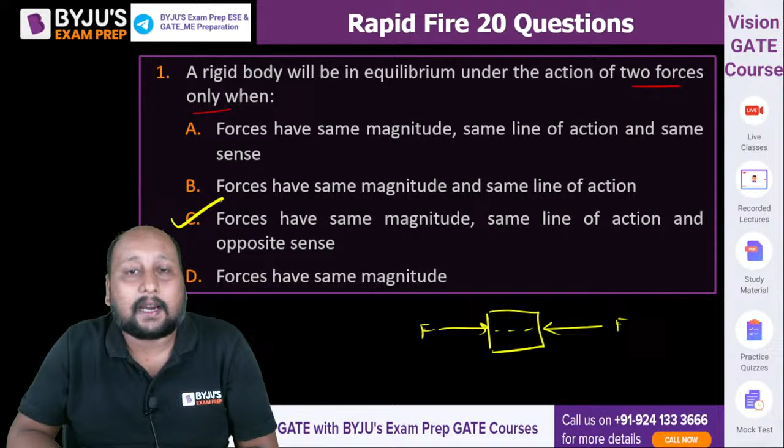Very good, Shreyas. Next, question number 2 on the screen. All clear? Anyone having doubt? Because if you have two forces, for the body to be in equilibrium both forces should have the same line of action, and also be at the opposite sense. F right side, F left side, they should act in opposite sense but same magnitude, then only the body will be in equilibrium. Because what is the equilibrium condition? The total force equal to 0 and the total moment equal to 0.

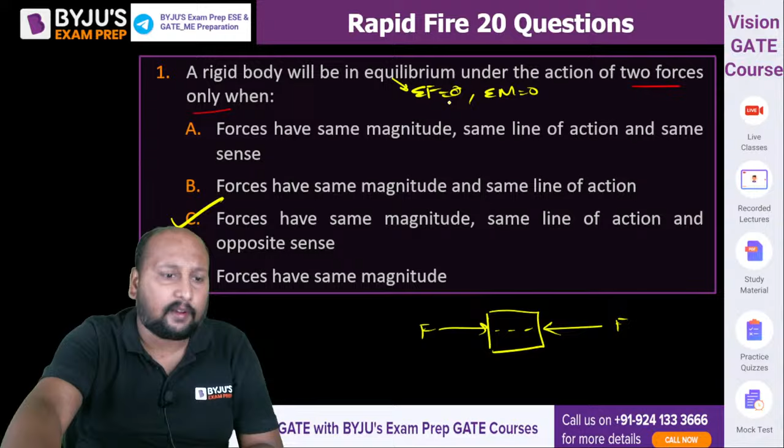Next question. Concurrent forces 2, root 3, 5, root 3 and 2 kilonewton act on one of the angular points of a regular hexagon towards the remaining 5 angular points. Determine the magnitude and direction of the resultant force. These are the angular points of a regular hexagon. What will be the magnitude and direction of the resultant force? Option A, B, C, or D? Simple question. Quickly, these are concurrent forces. So basically hexagon means we have 1, 2, 3, 4, 5 forces acting.

Quickly, A, B, C or D? Is it 10? Is it 1? Is it 10, 20? Your direction is 0, 180, 60 or 0 degree.

Draw the diagram. They're basically talking about a regular hexagon. So basically you know what's the angle between a hexagon's points. Okay, if I say this is a hexagon, right? So I can simply say this is your 2 kilonewton, this will be your root 3, right? This will be your root 5 or 5, this is your root 3, and this is your 2.

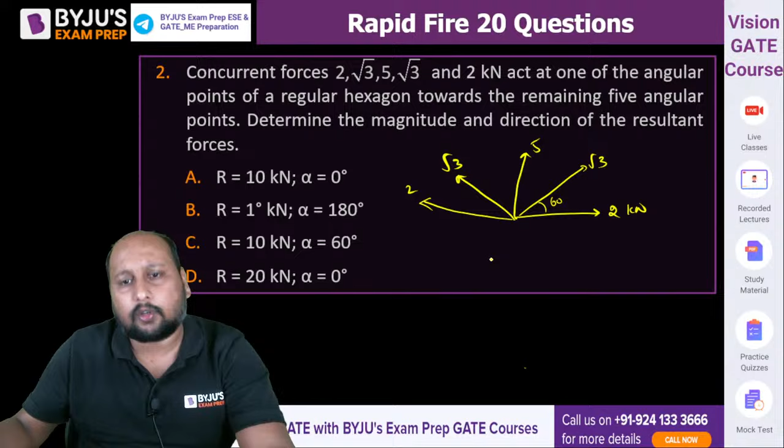Quickly, tell me the final answer. You have to calculate only 2 things, the total horizontal force and total vertical force. You calculate total horizontal force, total vertical force, you resolve the component, and then you can take tan theta is equal to, or tan alpha is equal to total vertical by total horizontal.

Option C, Sandeep is getting option C. What's the total horizontal force you are getting? Anyone who has calculated, use without any calculators, try to calculate total horizontal force, total vertical force, and tell me the result of that. Yes, Tarun, Shrey, Sandeep, you are getting option C. Might be you have solved this. Shreyash, Ashish, yes, quickly.

Done. Done. You have to take 60 degree each, right? So take the cos of this. We can say 2 plus root 3 cos 60 plus 5 cos 120, plus root 3 cos 180 plus 2 cos 240, like this. Similarly, we'll be having the sine component. You'll be getting total horizontal force will be equal to 5. Total vertical force I am getting like somewhere around 8, right?

8.6. So you take the resultant is equal to under root of total horizontal square plus total vertical square. So this is 5 square plus 8.6 whole square under root of this. So this is 25 plus 64, near about we'll be getting under root of 25 plus 66. So near about 200, near about 100 we'll be getting. Okay, so that is 10 kilonewton.

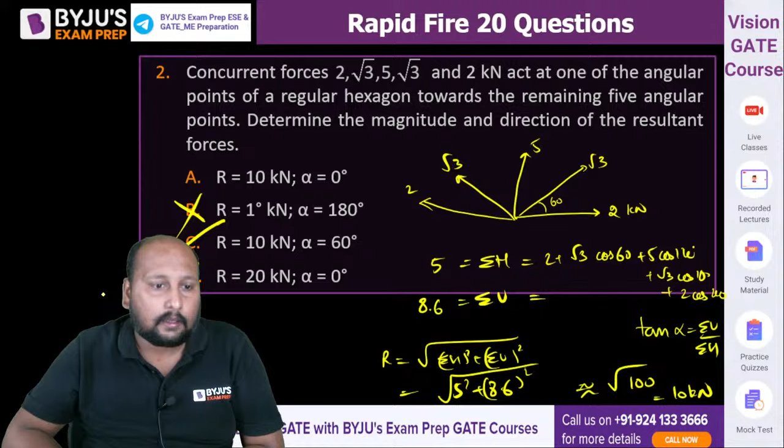10 kilonewton means you can eliminate option B and D, and definitely you cannot have an angle of 0 degree. We can only be left off with 60. You cannot have a 0 degree angle as a resultant force. So definitely you are only left off with option C as the correct answer. Okay, clear? Right? Next question on the screen.

A simple problem. 2 identical trusses support a load of 100 Newton as shown in the figure. The length of each truss is 0.1, cross section 9.94, we can round off to 10. That's why we're getting under root of 100, near about that, because we are not using a calculator now, so we have to approximate the value.

Okay, we are having the cross section area, we are having the Young's modulus. What is the net force in the truss AC? This is point C. Can we take the simple concept of Lami's theorem and get the answer? Or you can resolve the force and you can get the answer. Because both the members are inclined at the same angle, so equally the force will be distributed.

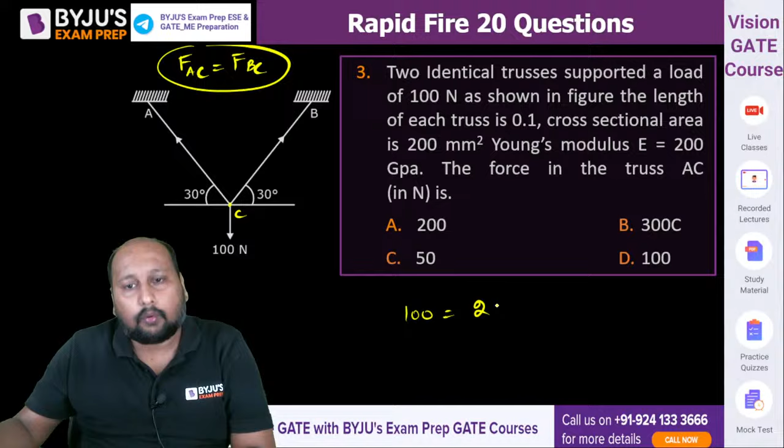So can we say FAC will be exactly equal to FBC? This will be equal. If both forces are equal, can we say that your 100 is equal to 2 FAC sine 30, right? So from here, FAC is equal to how much? I think your sine 30 is 1 by 2, 100 only. Option D? Yes? Are we getting option D? A simple question, guys, because both forces will be equal.

Equal length, equal cross section, equal inclination. FAC equal to FBC. So we can say sine 30 is 1 by 2, 2 and 2 get cancelled out. Option D is the correct answer.

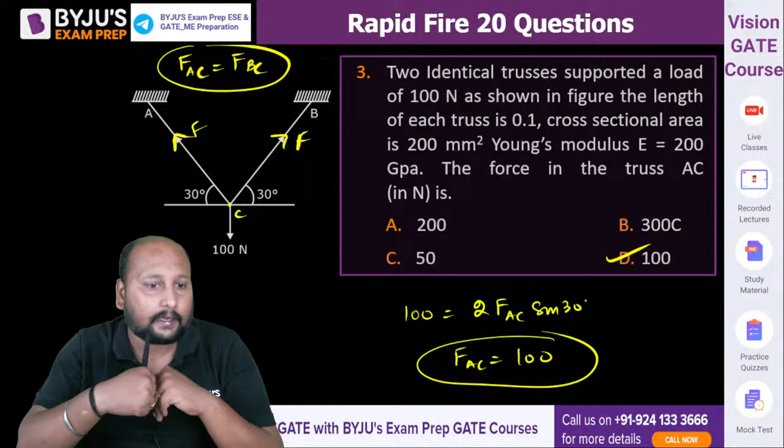This is an interesting one. I hope everyone is able to see the diagram. A 40 mm diameter water jet strikes a hinged vertical plate of 800 Newton weight normally at its surface, at its center of gravity. That means it is actually hitting at the point G. What will be the angle of deflection?

What will be this angle theta? After impacting, this particular vertical plate will be turning by some inclination. So you have to calculate what is the angle: sine inverse 0.353, sine inverse 0.32, or tan inverse 0.353, or tan inverse 0.321.

Quickly, this is the diagram. Okay, initial velocity, right? It is moving with a velocity of 15 meter per second, right?

This is the diameter. So can we say, let's say this is applying a force F? It has displaced a point. This is point G, right? This is point G. So this is L by 2.

This is F. So this is theta. This is also theta. This is 90 minus theta. This is theta.

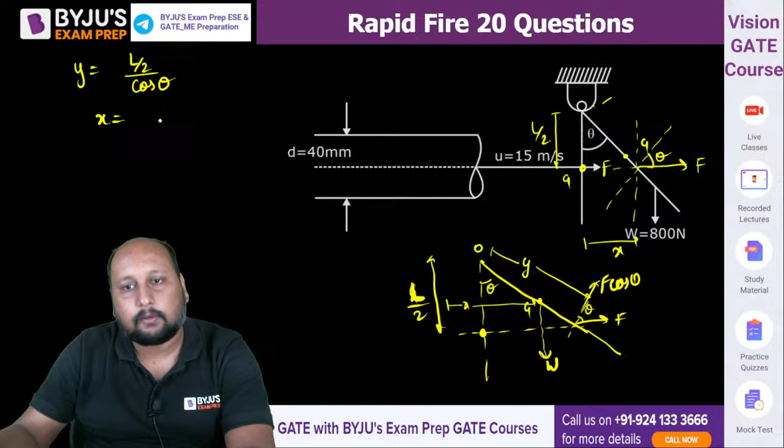This will be by cos theta, right? And what will be X? This is X. This distance is X. This distance is X. This is L by 2. So we can say X is equal to something along in tan. X by L by 2 is equal to tan theta. So from here I am having X is equal to L by 2 tan theta.

Yes, right? So equate the moment and tell me the final answer.

This is X. Okay, this will be your L by 2. One second. If I say this is your weight, this is your weight, right? So this is distance X. This is the distance X. This is L by 2. L by 2 cos, no, L by 2 sin theta. Yes, L by 2 sin theta.

Okay, so we got the value of X and Y. Equate the moment. F cos theta will create an anti-clockwise moment, W will create a clockwise moment. So we can calculate the moment about point O, and that will be equal to zero. That is F cos theta into Y is equal to W into L by 2 sin theta.

So F cos theta into Y is nothing but L by 2 into cos theta, is equal to L by 2 by cos theta, and this is W into L by 2 sin theta. So from here, this cos theta gets cancelled out, L by 2 gets cancelled out. So we're having F by W is equal to sin theta. So theta is equal to sin inverse of F by W.

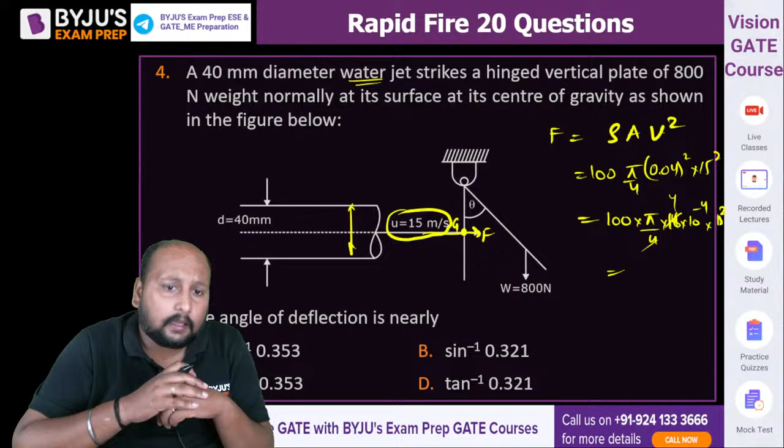Because sin inverse will be the answer, options C and D are not possible. So what is the nearest possible answer?

Yes, so near about 30, can we say 30? Approximately 30 Newton, and this we can say is 80. So we can say sin inverse 30 by 800. This is 0.0 something, 0.353. Everyone getting 0.353? A or B? Quickly. 0.353, yes, that is the correct answer.

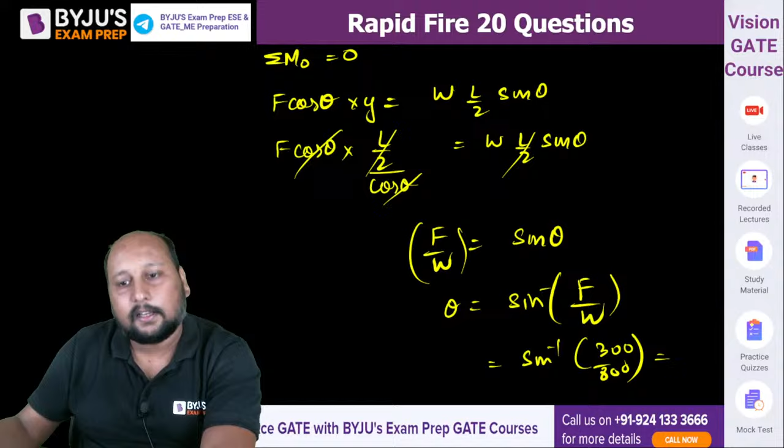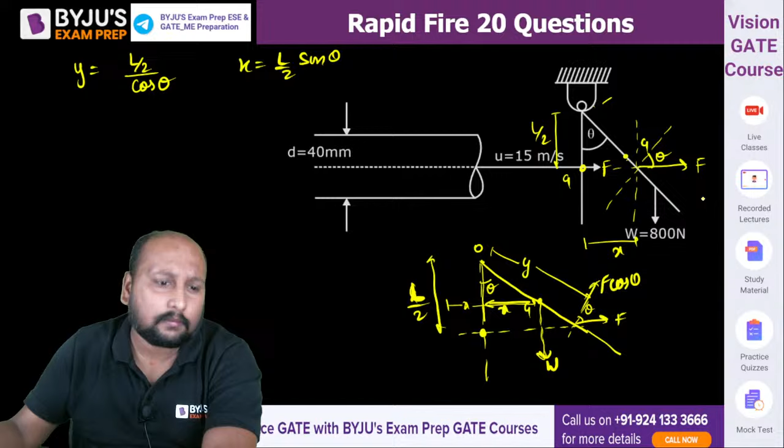0.35, so option A is the correct answer. Yes, because density of water is 1000, we had mistakenly taken it as 100. Okay, correct? Yes, thank you, Arun. Very good, everyone got the answer? Okay, because you have to do the calculation like this. Calculators are not allowed, right? So you have to do some approximations whenever you get a calculative problem like this.

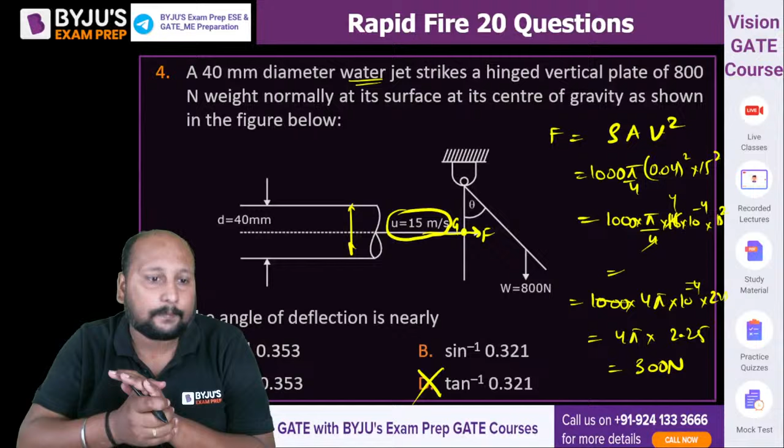A ball of weight 100 Newton is tied to a smooth wall by a cord making an angle of 30 degrees. Okay, let's draw the diagram. So this is something like this, this is your cord. So they are asking you, and definitely it will be in touch with the wall.

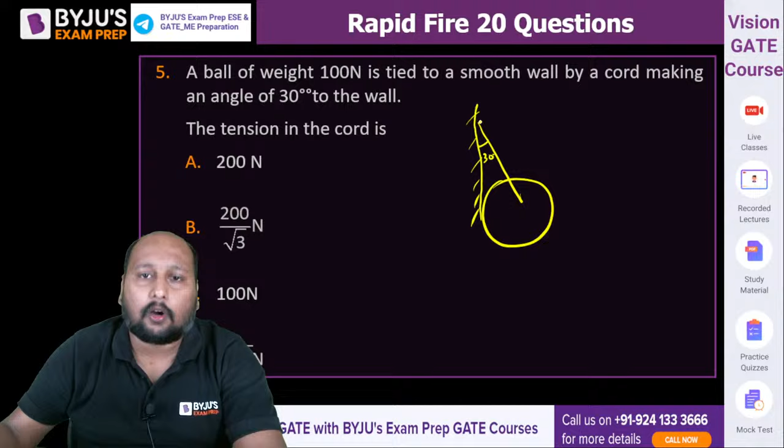Now tell me, this is making an angle of 30. What is the tension in the cord? Simple question, sir. We are having three forces: this is your tension T, this is the reaction force R, and this is the weight W. This is 30, this is also 30. So we can say T divided by sine of 90 is equal to W divided by sine of 90 plus 30, which is 120. So T is equal to sine 90 is 1, W is 100.

What is sine 120? That is cos of 30. Cos 30 is root 3 by 2. So this is 200 by root 3 Newton. Option B is the correct answer.

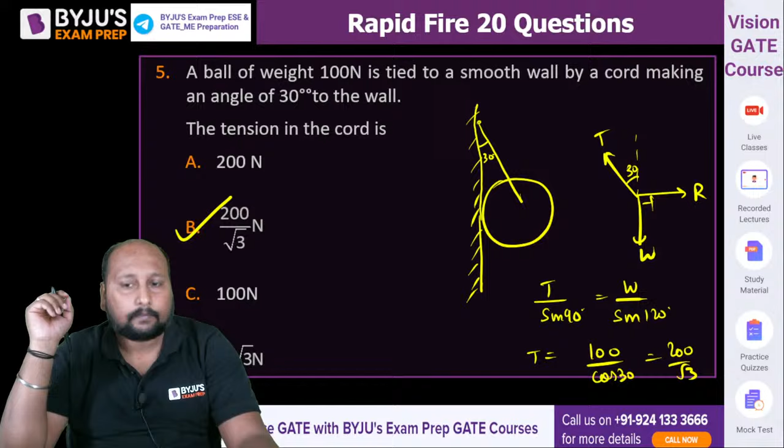If a body is in equilibrium, then the following statement is true. There is no force acting on the body. The resultant of all the forces is zero, but the moment of force about any point is not zero. The moment of the forces about any point is zero, but the resultant of all the force is not zero.

I think the statement should be... the moment should be zero, but okay, it should not be that there is no force acting on the body. The resultant of the force is zero, but the moment of the force about any point is not zero, or the moment about any point is zero but the resultant is not zero. Read the statement, they are saying the body is in equilibrium. Now we know that if a body is in equilibrium, the total force should be equal to zero and the total moment should be equal to zero, right?

I think the statement should be not true.

Vinod, option A. Sun, option C. Sandeep, option A. If a body is in equilibrium, then the following is true.

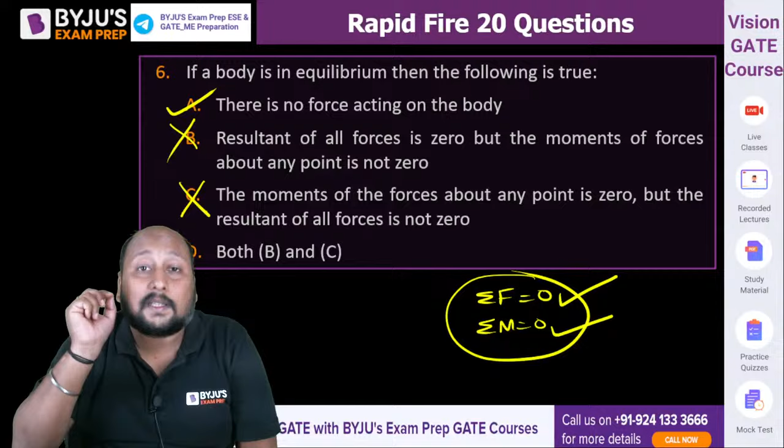Now sometimes we have this kind of situation in the examination, where you have to select the least we can say wrong answer. There might be a possibility - many times in ESE it is being repeated that you have to approach that solution which is the least incorrect. Okay, clear? Next question.

Question number 7 on the screen. I hope this is clear, everyone. Why have I gone with option A? Because equilibrium means the net force acting on the body and the net moment acting on the body should be equal to zero. That is a pure statement of equilibrium, the pure definition of equilibrium.

B and C is guaranteed not possible, so only we are left with option A. Chalo, next question, question number 7. A 13-meter long ladder is placed against a smooth vertical wall. So we are having a 13-meter long ladder, smooth vertical wall.

This is A, this is B. What should be the coefficient of friction between the ladder and the floor so that the ladder remains in equilibrium? A most frequently asked question in many examinations. Let's say this is RB, this is weight W, this is NA or RA, reaction at A, and this is the friction force FB. So I've drawn all the possible forces.

At point A there won't be any friction because the vertical wall is smooth, right? So we can say total horizontal force equal to 0, that means RA is equal to FB, and total vertical force is equal to 0, that is RB is equal to W, right?

Now they are asking us to calculate. So what we can do, we can take moment about point B, and make it equal to 0, right? So this is 13 meter. Let's say I'm taking this as L. This is L, okay, and this is X. Or let's say this is theta. Let us take it as theta.

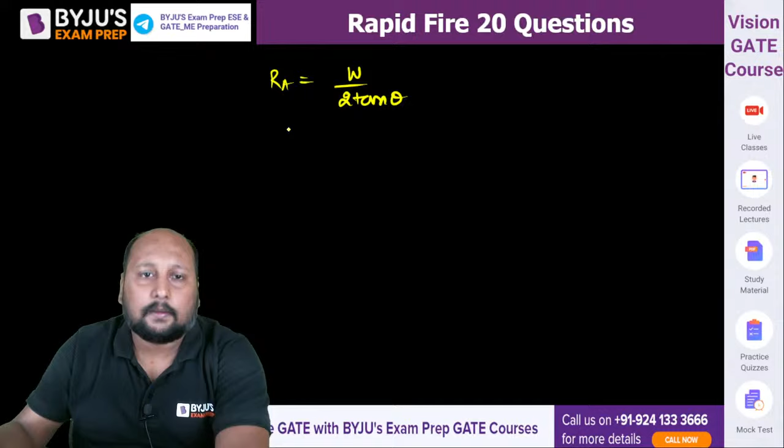Now what is RA? RA is equal to FB. What is W? That is equal to RB tan theta, or I can say FB is mu into NB, mu into RB. This is RB by 2 tan theta. This gets cancelled out. Mu is equal to 1 upon 2 tan theta.

Okay, now this is theta. They are saying that this distance is 5 meter, right? This is equal to 13 meter. So what will be this height? Anyone? If this is 13, hypotenuse is 13, that is 25. We can say 13 square minus 25... root of that, can we say this is 12? Yes, 13 square is 169, minus 25... 144, root of 144 is 12, so we can say this is 12.

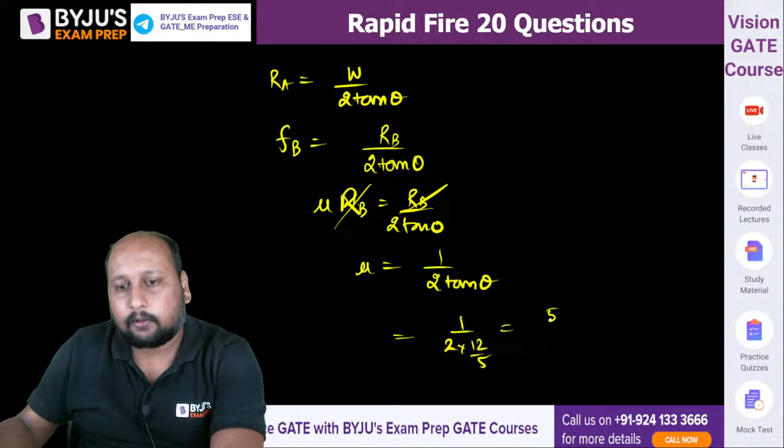So tan theta, what is tan theta? Tan theta is equal to 12 by 5. So we can say this is 1 upon 2 into 12 by 5. This is 5 by 24. So mu value is equal to 5 by 24 is the final correct answer.

Which option is matching? You have to go with the nearest value: 0.21, 0.25, 0.29. D is not possible. A, B and C - which is the final correct answer? We are getting mu is equal to 5 by 24.

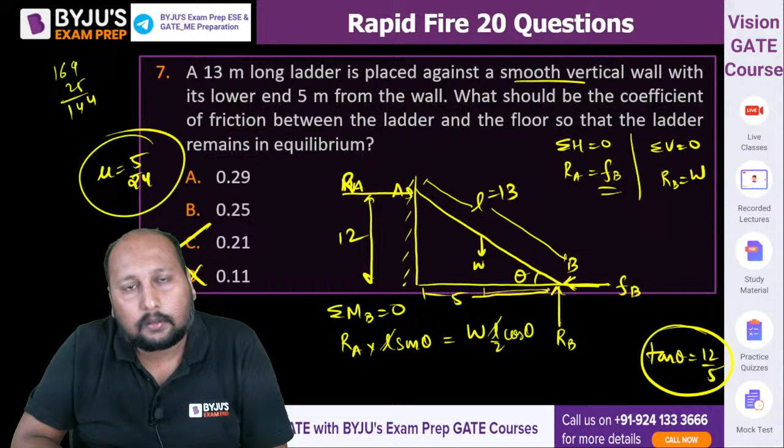0.21, option C. 5 divided by 24 is 0.21, 0.21 option C. Very good. Okay, clear. Option C is the correct answer.

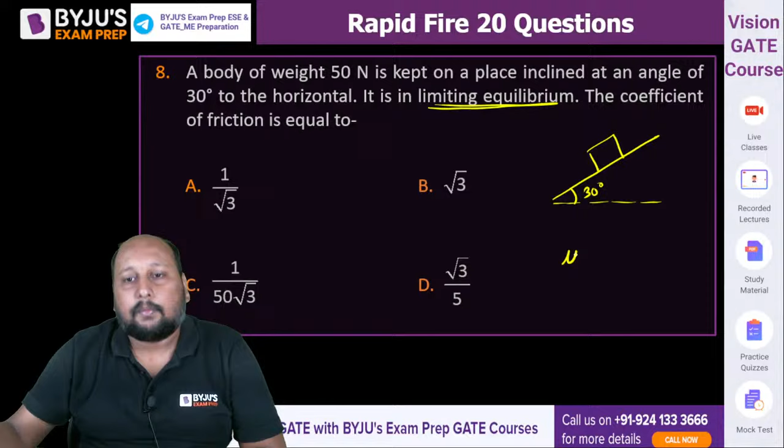The body is in limiting equilibrium. Can we say the angle of inclination is equal to angle of repose? The body is in limiting condition - can we say this is the point at which the body is about to slide? Or can we say mu is equal to tan of theta?

That's it. So this is tan 30. Tan 30 is 1 upon root 3. Option A is the correct answer. Very good, son. Simple hai na?

If the body is in limit, that means the angle of inclination is equal to angle of repose. And we know phi is equal to tan inverse mu. So we can apply that logic and directly get the answer, no need to resolve the force. Ultimately you will be getting the same relation. Sometimes you have to think in a logical way rather than going for that conventional way. Option A correct, very good.

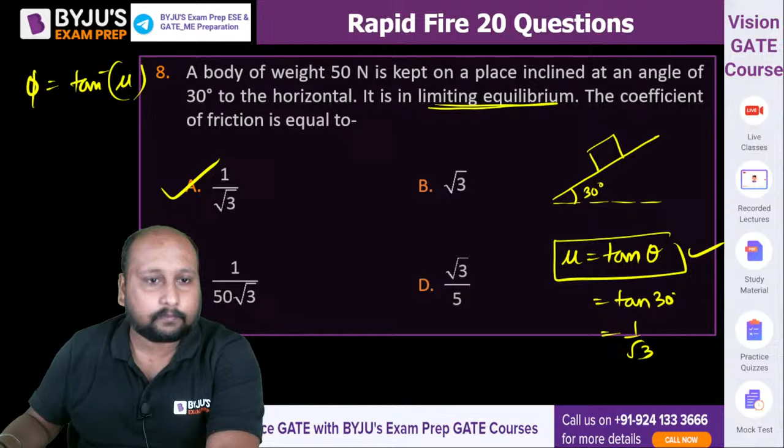Next, a box of weight 1000 Newton is placed on a ground, having a weight of 1000 Newton. This is the normal reaction.

The box is pulled by a horizontal force of 100 Newton. The frictional force is this one, developed between the box and the ground at the impending motion. They are asking you what is the limiting friction, the value of limiting friction. I hope you know what's the value of limiting friction.

Mu value is given as 0.5. We know that FL is equal to mu static into normal reaction. Total vertical force equal to zero, so normal reaction is equal to 1000 Newton. So we can say this is 0.5 into 1000, which is 500 Newton.

Now they're saying the friction force developed in the box and ground at impending motion - they are talking about impending motion. Is it C or D? When the box is pulled by 100 Newton horizontal force, the friction force developed between the box and the ground at impending motion - what should be your answer?

They are not just talking about the friction force developed between the bodies. If they're asking about the friction force developed between the box and the ground simply, the answer would be option C, 100 Newton. But since they specifically mention impending motion, that means they are talking about the limiting condition - and for limiting condition, what is the friction force?

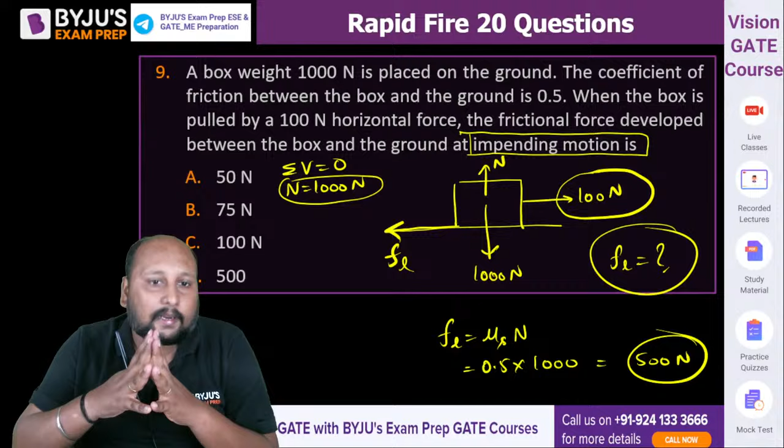Quickly, because here the body will be in the static condition, since the limiting friction is 500 Newton, you need to apply a force of 500 or more to move this body. And we are only applying 100 Newton.

So they are asking you to read the question carefully. When the box is pulled by a force of 100 Newton, the friction force developed between the box and ground at impending motion - then the answer should be 500 Newton, not 100 Newton. The reason being they clearly mention impending motion. If they simply asked for the friction force developed between box and ground, option C would be correct. But by adding these two words, impending motion, they are basing this on the limiting condition.

If force 100 Newton is being applied, the body is not in impending condition, right? They are asking what will be the friction force between the box and the ground at impending motion. That means if you apply a force near about 500 Newton, then the body will be at impending condition. In order to fulfill this condition, the applied force should be equal to 500 Newton. Only then will the body come to this impending condition. At 100 Newton, the body is not in impending condition, right?

Vinod? Yes. Okay, fine, any doubt? Please do let me know.

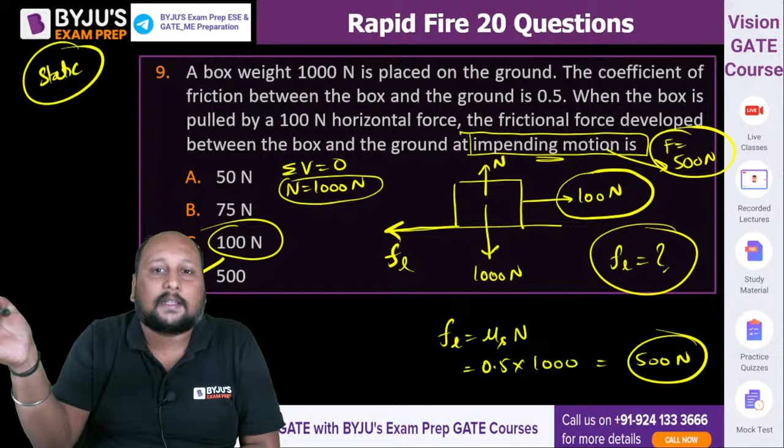The friction force developed between the box and the ground at impending motion. By adding this, they are making the problem slightly complicated. If they had just written friction between box and the ground, the answer is directly 100 Newton. That's it, no doubt in this. Okay, next.

That means we are talking about the limiting condition. All the calculations will be done under limiting condition because they are saying the man is just able to move the block to the right. Okay, chalo.

So we'll be having one normal reaction for the weight of the body. Normal reaction will be equal to W minus T. They are asking what will be the tension in the string in order to have just... so we can say 100 Newton will be exactly equal to the friction force, limiting friction, that is equal to mu into N. So from here you can get the value of T.

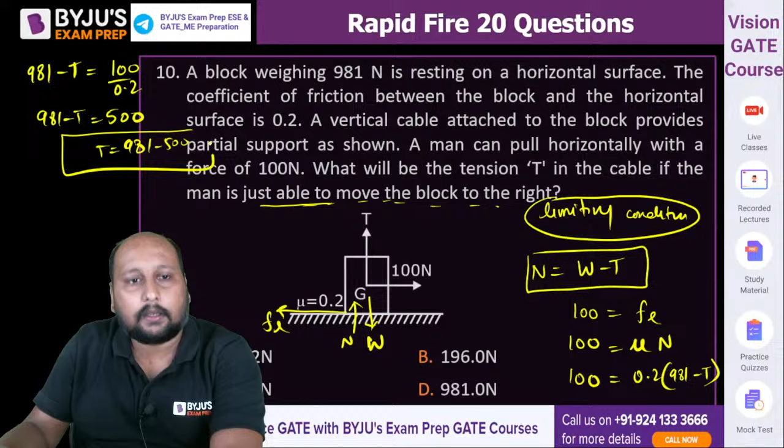100 is equal to mu value 0.2 into N, where N is W minus T, i.e. 981 minus T. So 981 minus T is equal to 100 by 0.2, which is 500. So T is equal to 981 minus 500. The nearest value is 481 Newton, option C.

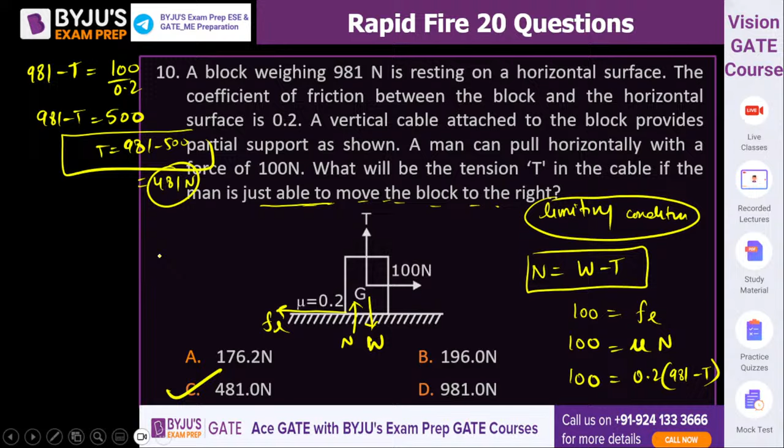Are you getting option C, 481? Okay, you're not able to see the options, now I think it is quite visible. Is this clear? 481, option C, 481 Newton. Yes, right, all clear? This was an easy question. Done, 481 Newton is the final correct answer.

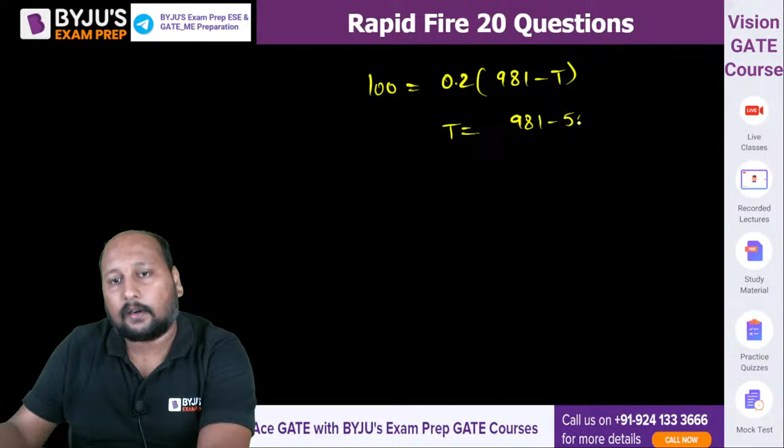Simple, right? Any doubt in calculation? 100 is equal to 0.2 into 981 minus T. So T is equal to 981 minus 500, that is 481 Newton, the exact value, not even a round off value.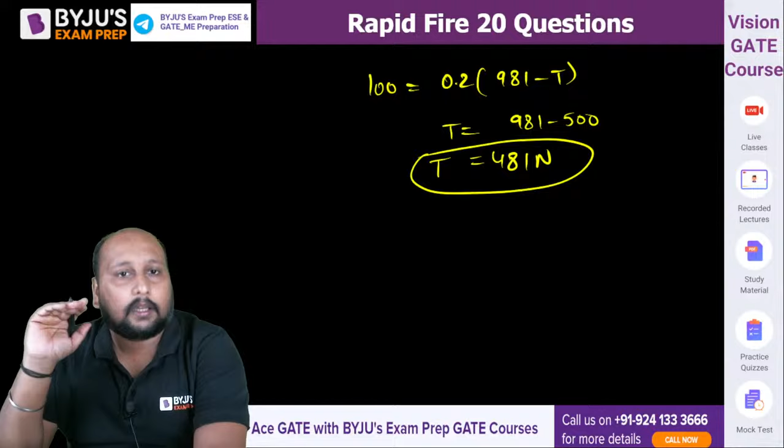Right, let's go to the next question, question number 10th, 11th on the screen. Halfway we have completed, now halfway is left. So I want your support to get the answers as soon as possible.

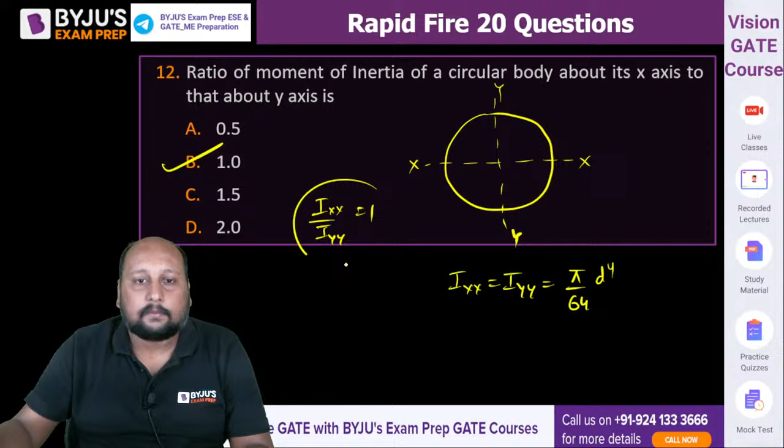They are saying the ratio of Ixx by Iyy, that is equal to 1. Option B is the correct answer. Chaliye, next question on the screen, 13.

Choose the correct combination of the stability and indeterminacy for the truss given below. The given truss is statically indeterminate and stable. It is statically determinate and stable. It is unstable, and none of the above.

Identify the number of members, number of joints, and use a simple formulation to identify the type of truss that we are having. So you are having 1, 2, 3, 4, 5, 6, 7, 8. Member is equal to 8. Number of joints 1, 2, 3, 4, 5, 6. 6 number of joints, okay.

Chaliye, apply and tell me, is this stable or unstable, statically indeterminate and stable, or statically determinate and stable? Quickly. A, B, C or D? Quickly, what is the equation? M is equal to, yes, 2j minus 3, right?

If this equation is satisfied, the truss will be a perfect truss, right? Now number of joints is 6, so 12 minus 3, that is equal to 9. So M is less than 2j minus 3. So what is the answer? Yes, it is unstable. This will be unstable because the number of members are not sufficient enough to hold that load.

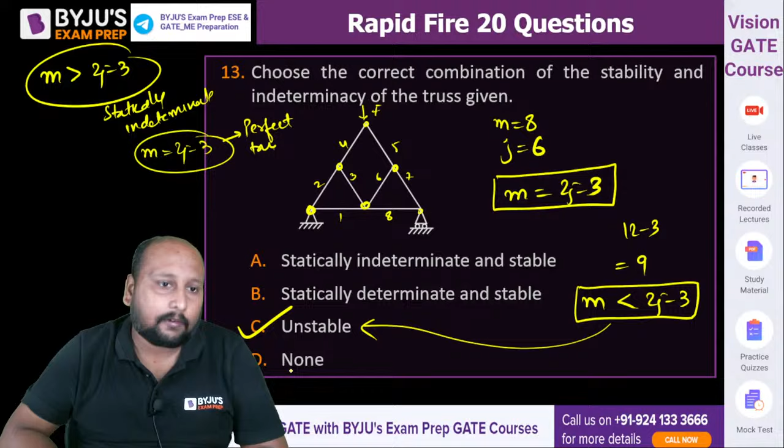If m is equal to 2j minus 3, then that is a perfect truss, right? In our scenario, we are getting m is less than 2j minus 3, that's unstable. Chale, next question on the screen.

This is an interesting one. From kinetics, the motion of a body moving on a curved path is given by x is equal to 4 sine 3t and y is equal to 4 cos 3t. What is the resultant velocity of the car? Calculate the x component of the velocity, calculate the y component, and tell me the nearest possible value. Is it 30, 24, 12 or 40? Calculate your x component velocity, y component velocity, and take the root of that to get the final resultant velocity.

Displacement is given along the individual axis x and y. You can differentiate dx by dt, that will be vx, that is dx by dt, that is equal to 4 into 3 cos 3t. dy by dt, it is minus 4 into 3 sine 3t, right?

So we can say the resultant will be equal to under root of vx square plus vy square. This is 12, and 12 will be common, so that will be outside. This is cos square 3t plus sine square 3t, and that will be equal to 1. This is 12 meter per second. The final answer is option number C.

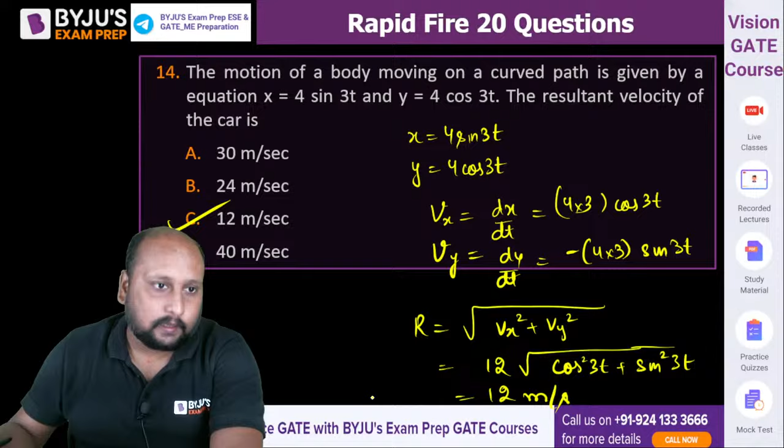Question number 15 on the screen is from a very easy topic. The midpoint of the rigid link of the mechanism moves as translation along the straight line from rest with a constant acceleration of 5 meter per second square. What is the distance covered by the said midpoint in 5 seconds of the motion? Simple question - they have given you the acceleration.

It is starting from rest, right? The acceleration is given as 5 meter per second square. You need to calculate what is the distance traveled when the body has traveled a time of 5 seconds. Simple question - you can apply equations of motion because we are having a constant acceleration.

So s is equal to ut plus half at square. Half at square, initial velocity is equal to 0. This is half into a is 5, t square is 25. So this is nothing but 2.5, that is 62.5. Are you getting 62.5 meter? Option D.

62.5. Yes, by 125 by 2. 125 by 2 is 62.5. Vinod, I hope this is clear, right?

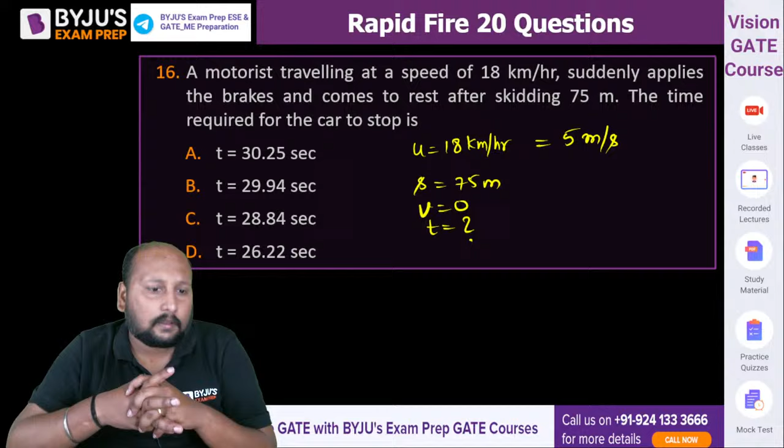What happened? Simple question - final velocity and initial velocity are given, distance traveled is given, right? Final velocity is 0, you have to only calculate the value of t. Yes, quickly, what is the acceleration? Anyone who can tell me, what is the acceleration?

We can apply v square is equal to u square plus 2 into a into s. This is the retardation happening. So final velocity is equal to 0. u square is 5 square minus 2 into a into 75, right? So a is equal to 25 by 2 into 75, so this will be 1 by 6 meter per second square.

We got the value of retardation. Once retardation you have calculated, now we can calculate the value of t, that is v is equal to u plus at, right? This is 0, initial velocity is 5, minus a is 1 by 6 into t, right? So from here t is equal to 30 seconds. 30 seconds.

Option... oh no, the nearest value will be option B, 29.94. That should be the nearest value.

Option B - actually this is a very close call. 30.25 should not be given. 29.94 is more closer to 30. Ideally, I can say 29.94 is closer to option B rather than option A.

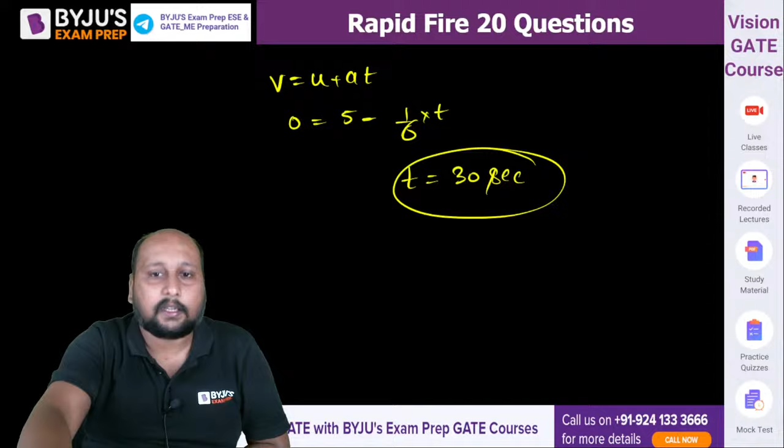But this kind of option situation, many times in ESE also we are having this kind of situation. So always try to go for the most correct answer. B is the most closest answer, having a difference of 0.06. Option B is the correct answer. Please make sure such questions sometimes occur, but such a difference is rare. But if they are giving the options like this, you have to be careful. We have calculated 30 and we are getting exact 30. Okay, next question on the screen, 17th problem.

This is a question from the collision topic. This is the direct result that we are using.

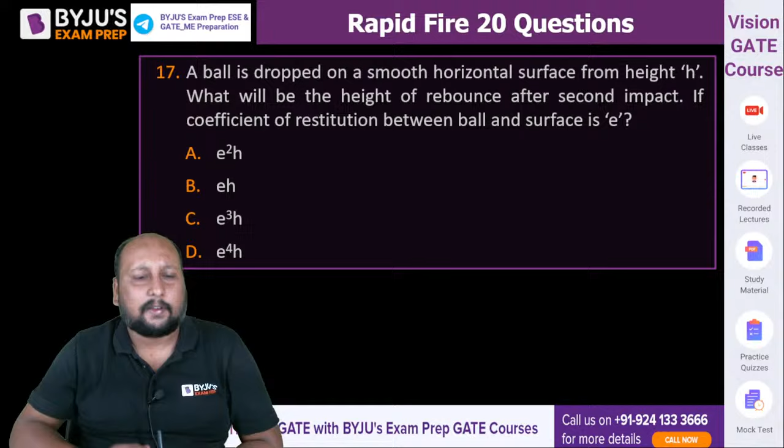A ball is dropped on a smooth horizontal surface from a height h. What will be the height of rebound after the impact, after the second impact, if the coefficient of restitution is E? Simple formula, simple question. Let's say this is after first and this is after second. So they are asking you what's the value of H2 after second rebound.

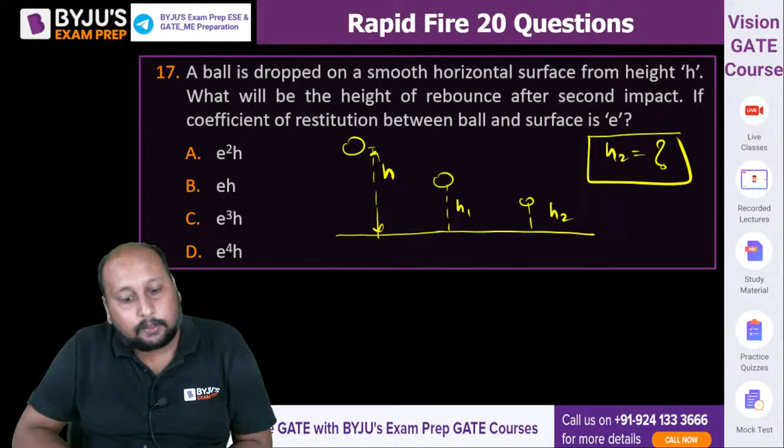This is after first rebound, this is after second rebound. Option A, option B, students do commit mistakes here. Is it E square H, or E H, or E cube H, or E to the power 4 H? Quickly think about it.

Look, after reaching a height h, before collision the velocity will be root of 2gh. After collision, let's say this is v2, or v1, with velocity root of 2g h1. So coefficient of restitution is equal to v1 by v, that is root of 2g h1 by root of 2gh. So h1 is equal to e square h.

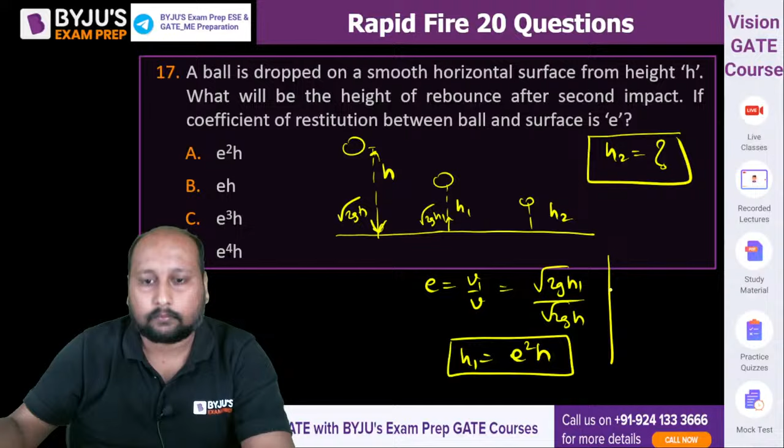Similarly, if you apply between h1 and h2, what do we get? h2 is equal to e square h1. So if you try to visualize, I have to create a relation between h2 and h. We have h1 equal to e square h, and h2 equal to e square h1. So can we say h2 is equal to e to the power 4 h? Option D is the correct answer.

This is the common mistake students are committing. Let me help you out. If there is a body dropping from an initial height of h, after n rebounds, let us suppose it is reaching a height of hn, then hn will be equal to e to the power 2n into capital H.

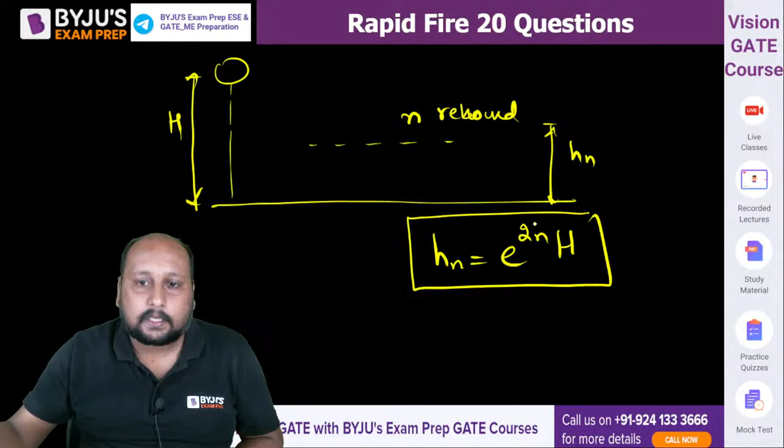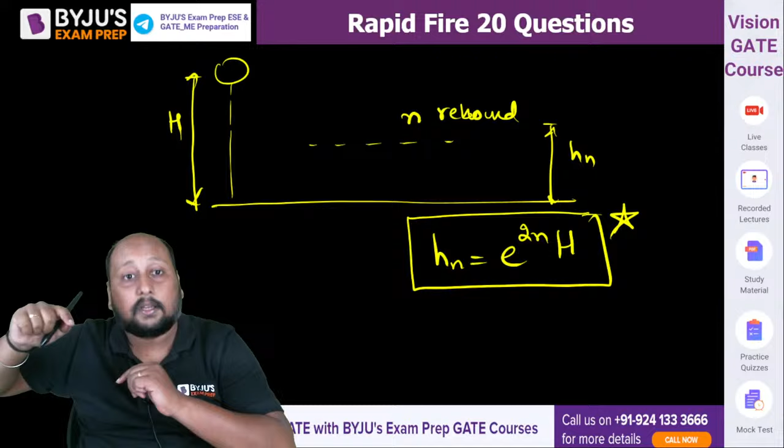Remember this simple formulation. If you're having one rebound, it's e square h. If you're having two rebounds, it's e to the power 4 into h. This direct formulation you have to remember, because sometimes you can use it directly in the examination. After n rebounds, the height of that particular ball will be equal to e to the power 2n into capital H.

This question is saying second impact, so n is equal to 2. Option D is the correct answer. This mistake that you are committing is actually good, because now you are learning from this, and you won't commit this mistake in the examination.

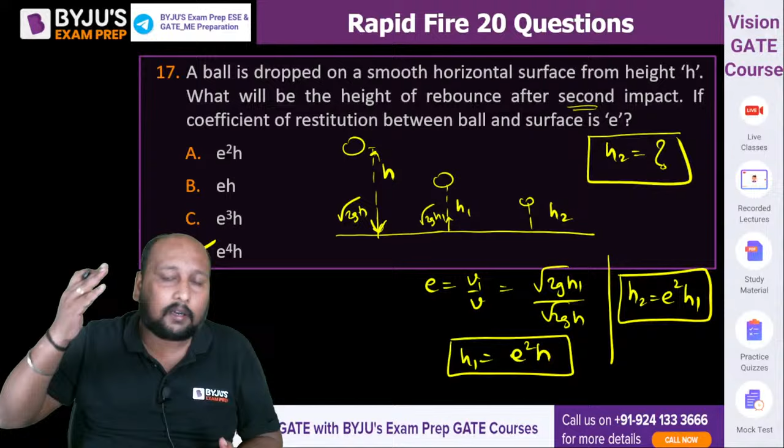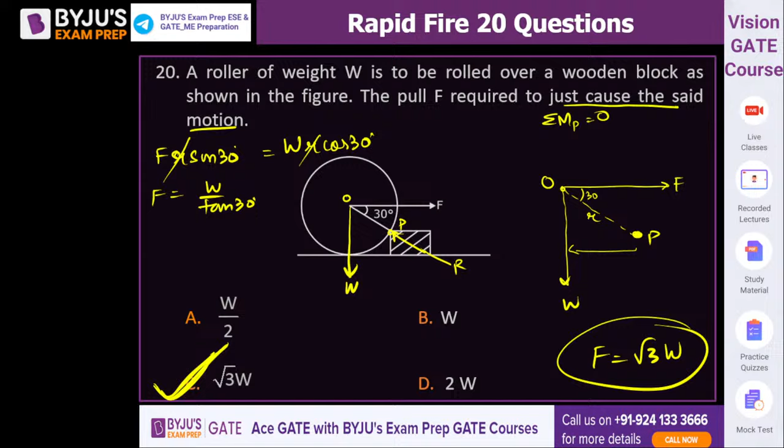Done, that is a simple question guys. You have to just apply the moment about a point, because this is just about to cause the motion, again we are talking about limiting condition. The option is not visible, let me hide myself. Now I think you are able to see option C, root 3 W. Okay, chaliye, perfect.